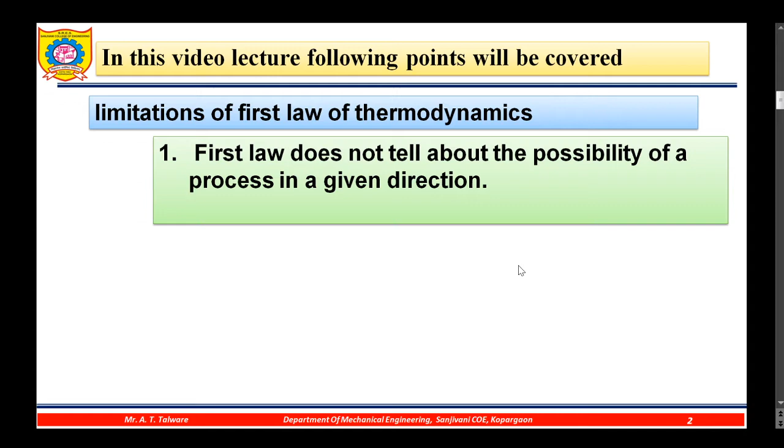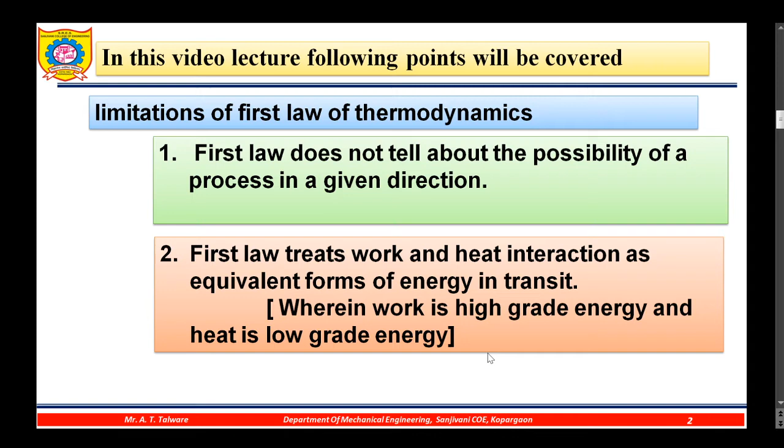The first limitation is first law does not tell about the possibility of a process in a given direction. The second limitation is that first law treats work and heat interactions as equivalent forms of energy in transit, wherein work is high grade energy and heat is low grade energy. So these are the two limitations of the first law of thermodynamics, which will be explained in detail in the further slides.

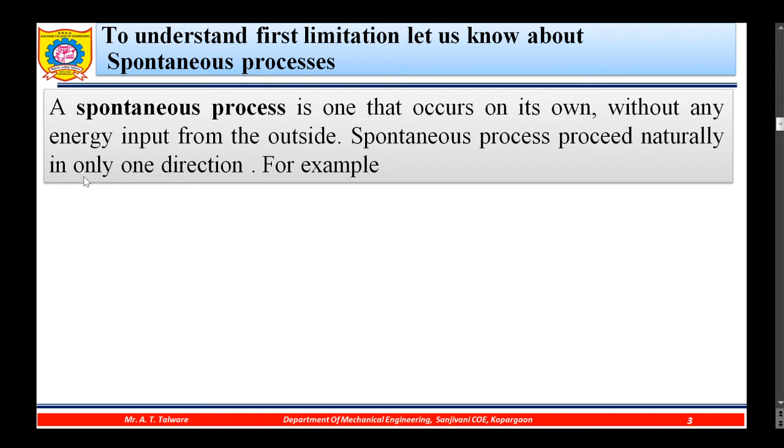To understand the first limitation, let us know about spontaneous processes. A spontaneous process is one that occurs on its own without any energy input from the outside. Spontaneous processes proceed naturally in only one direction. For example, water flows from high elevation Z1 to low elevation Z2.

The reverse process will not occur spontaneously, that is naturally. Second example is fluid flows from high pressure P1 to low pressure P2. This is the forward process 1 to 2. The reverse process will not occur spontaneously, that is naturally.

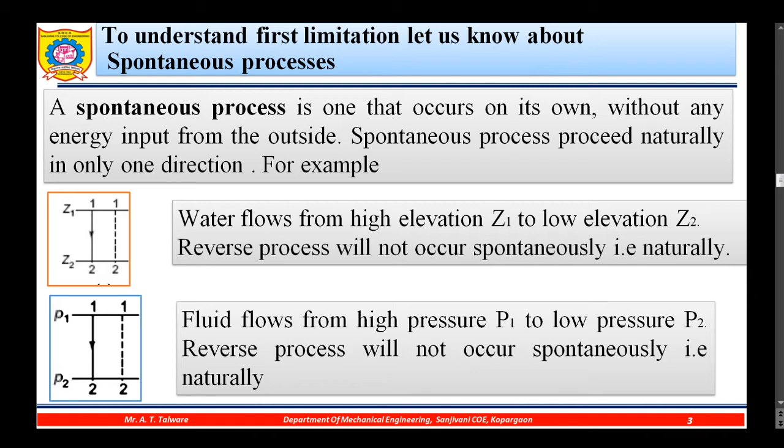Third example of spontaneous process is heat flows from high temperature T1 to low temperature T2; the reverse process will not occur spontaneously. Mass transfer of a constituent in a mixture takes place from a high concentration C1 to low concentration C2, where C is in grams mole per meter cube. The reverse process will not occur spontaneously, that is naturally.

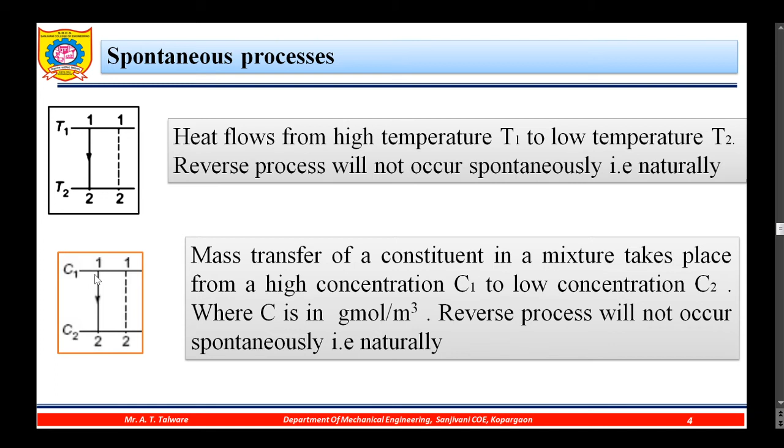So the forward process is possible, the reverse is not possible naturally. Electric current flows from high electric potential E1 to low electric potential E2. The reverse process will not occur spontaneously, that is naturally.

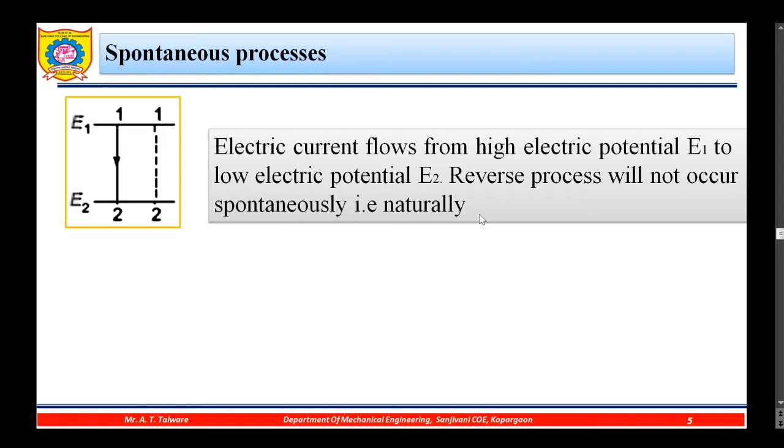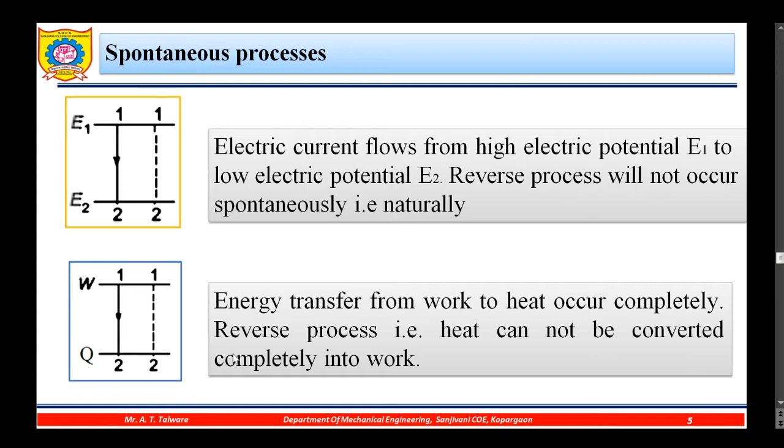Similarly, the energy transfer from work to heat occurs completely. Work can be completely converted into heat, but the reverse process, that is heat, cannot be converted completely into work. So the conclusion is the processes occur in a certain direction and not in reverse direction.

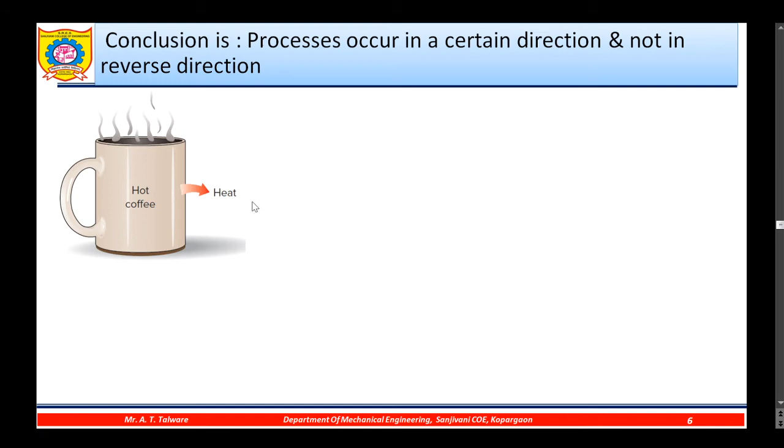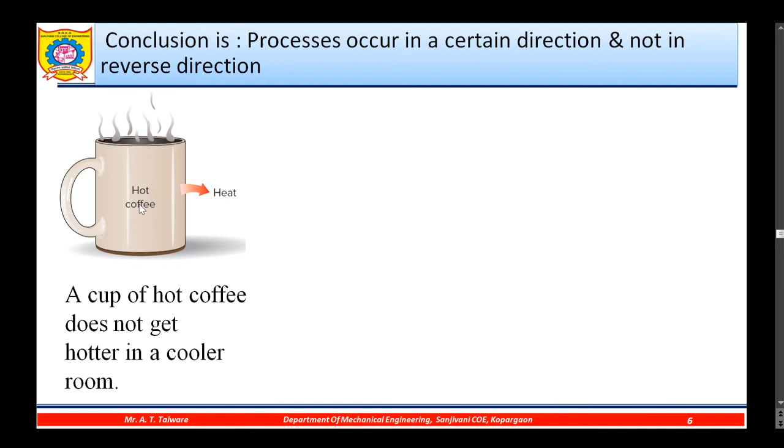Some more examples: if you place hot coffee in the cold surrounding, naturally the heat will flow from the hot coffee to the cold surrounding. But a cup of hot coffee does not get hotter in a cooler room. This means heat cannot flow from lower surrounding temperature to the higher hot coffee temperature. So the reverse is not possible.

Now consider the electrical heater: if current flows through the heater, it can convert electrical energy into heat energy. But if we supply heat, will current flow? Obviously no. So the reverse process is not possible; transferring heat to a wire will not generate electricity.

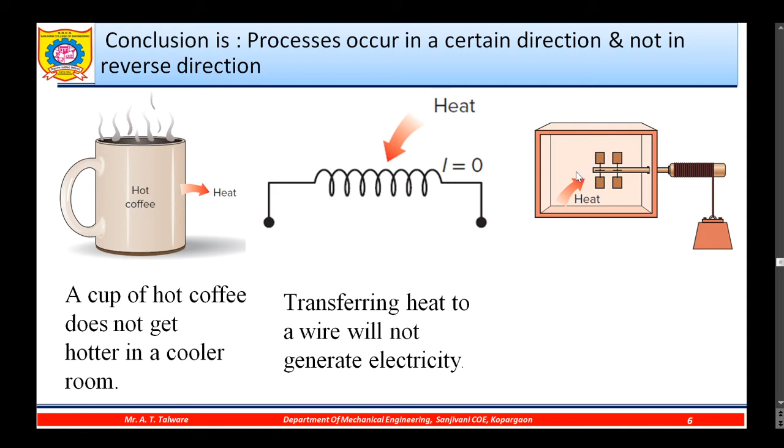If this weight is lowered by some distance, this paddle will rotate and it generates heat. So if we supply heat, will this weight be raised? No, obviously not. So transferring heat to a paddle wheel will not cause it to rotate, and this weight cannot be raised.

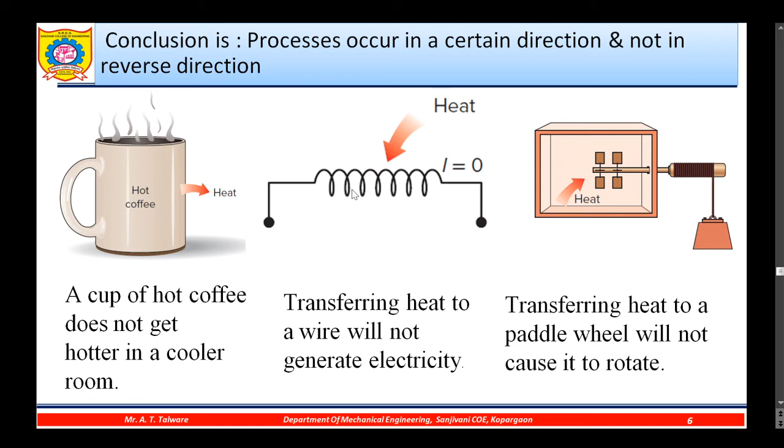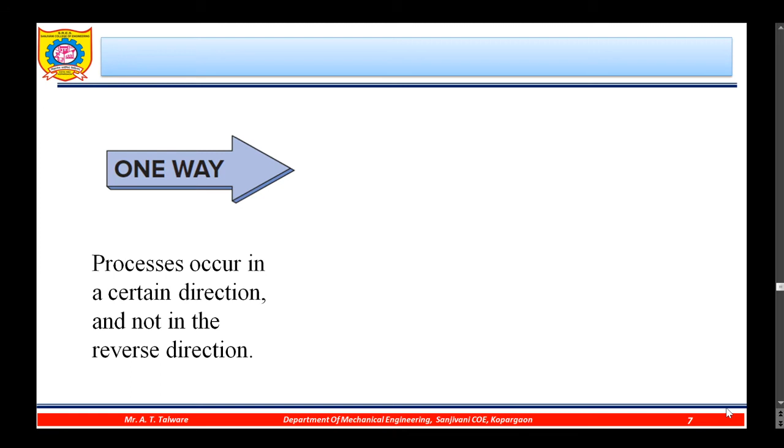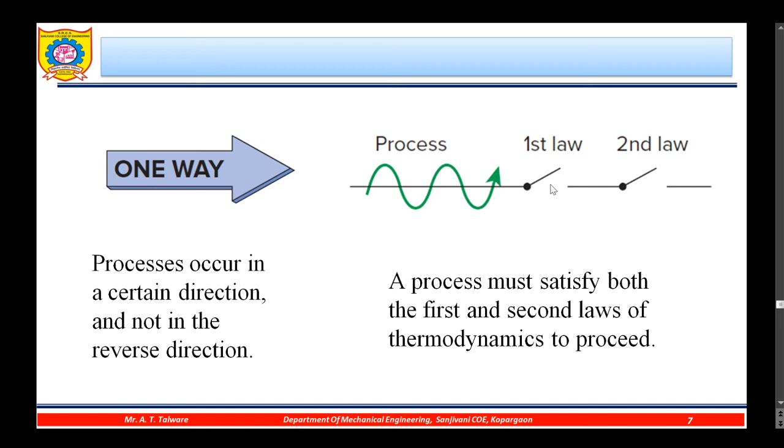A process must satisfy both the first and second law of thermodynamics to proceed. So if a process should occur, it should satisfy the first law as well as the second law to execute. So what is limitation 1? From these examples, we can conclude: the first law places no restriction on the direction of a process, but satisfying the first law does not ensure that the process can actually occur.

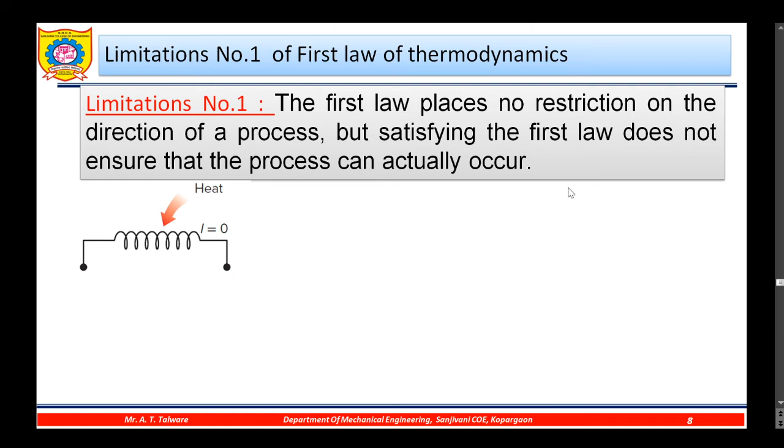Consider the same example of electric current flowing through the heater. Assume the reverse process occurs: if we supply heat, it is converted into electric work. So rate of heat transfer Q equals rate of electric work transfer, that is V into I, considering direct current, that is V into I watt.

So here the first law is satisfied. What is the first law? First law is the balance of energy. So if you assume that heat is converted into electric work completely, here the first law balance of energy is satisfied.

One more example: suppose the reverse process is possible. Heat is supplied to this paddle wheel, and this is converted - the weight will be raised, and that is converted into increase in potential energy, that is mg times z2 minus z1, the difference in height. So here, according to the first law, energy balance is satisfied.

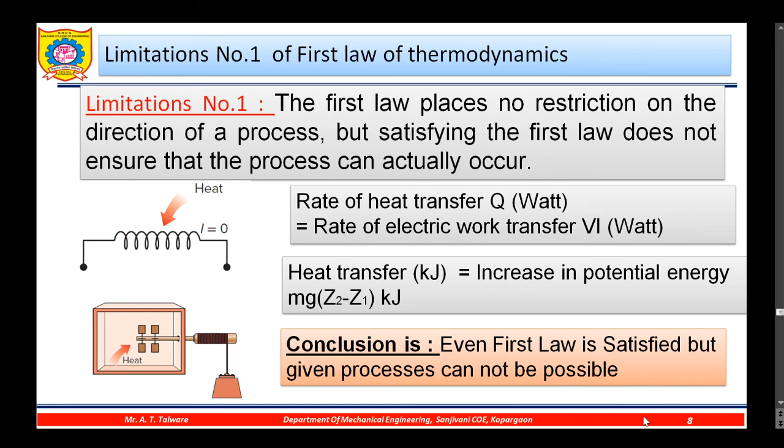But what is the conclusion? The conclusion is even though the first law is satisfied, the given process cannot be possible. So the feasibility of the process is not given by the first law of thermodynamics. If the process has occurred, the first law is always satisfied; but if the first law is satisfied, whether the process is possible or not cannot be determined from the first law of thermodynamics. So this is limitation number 1.

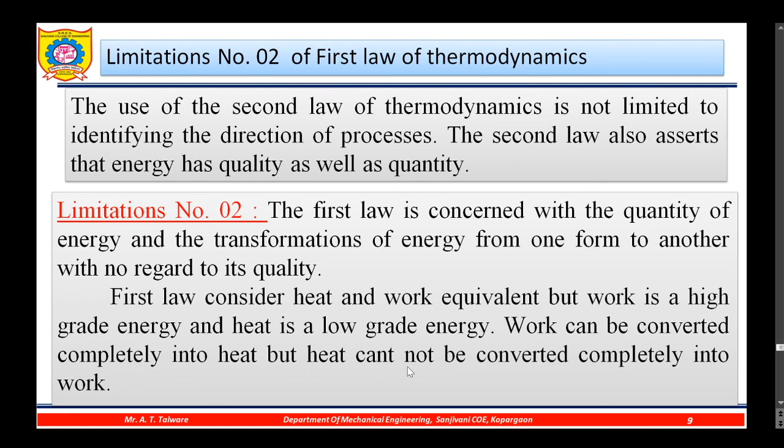Second limitation of the first law of thermodynamics is that the use of second law of thermodynamics is not limited to identifying the direction of processes. The second law also asserts that energy has quality as well as quantity. So limitation number 2 is: the first law is concerned with the quantity of energy and the transformation of energy from one form to another with no regard to its quality. First law considers heat and work equivalent, but work is high grade energy and heat is low grade energy. Work can be converted completely into heat, but heat cannot be converted completely into work.

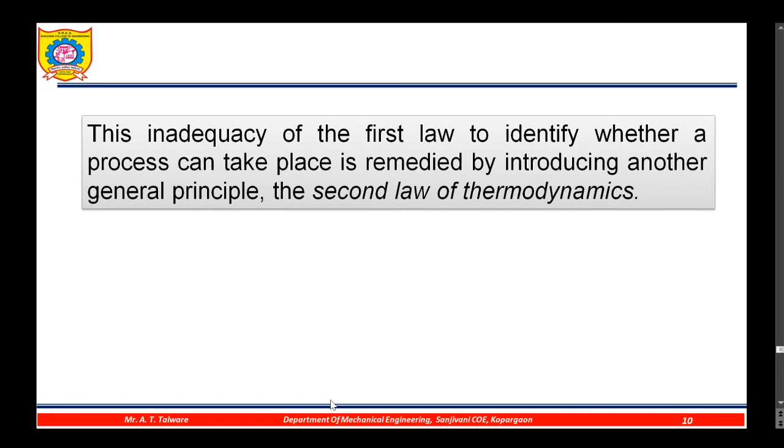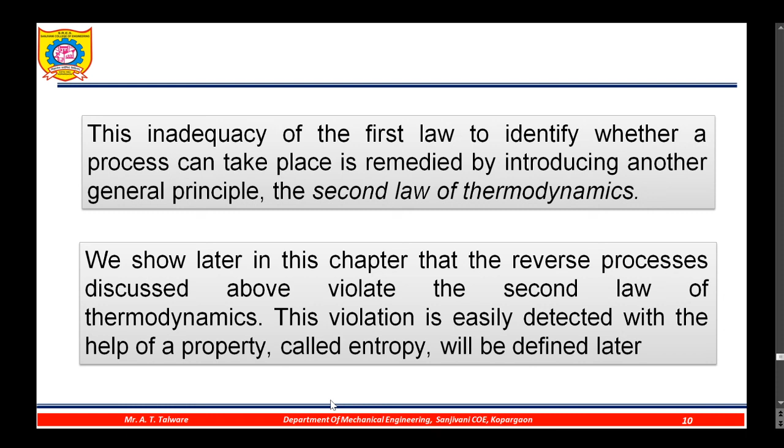This inadequacy of the first law to identify whether a process can take place is remedied by introducing another general principle, the second law of thermodynamics. We show later in this chapter that the reverse processes discussed above violate the second law of thermodynamics. This violation is easily detected with the help of a property called entropy, which will be defined later. So today we'll stop here. Thank you.